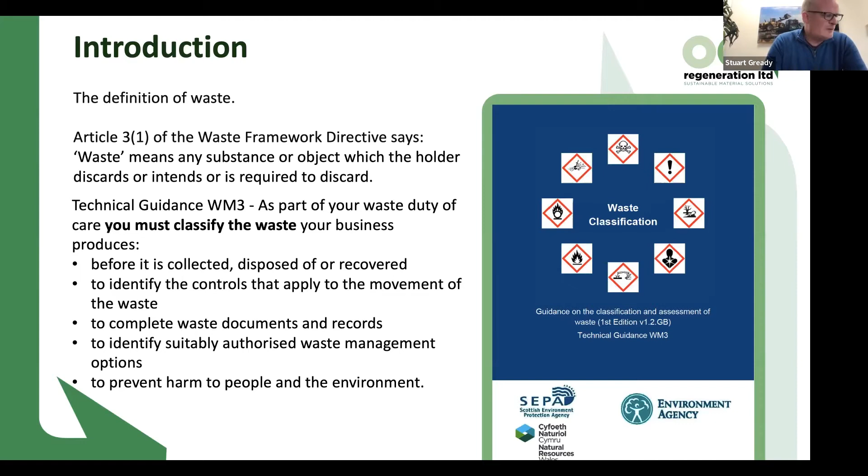Asphalt waste containing coal tar must be classified. So in any highways maintenance works, if there's planings coming out of any job, that waste owner has a duty of care to classify that waste. So before it's collected or recovered, it needs to be classified, and hence the paperwork looked after correctly. And this is to prevent harm to people and the environment.

So the duty of care, there's two pieces to it. The CDM rules, where a designer has to identify and minimize hazards, and the Environmental Protection Act, where any person dealing with a waste has to take reasonable steps to ensure no unauthorized deposits. Now that means in order to understand what an unauthorized deposit is, we have to classify the waste.

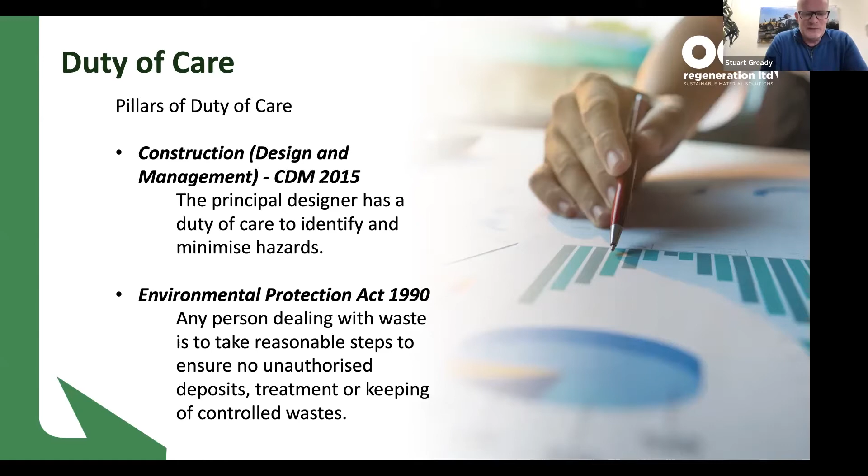So WM3 is the framework here in the UK. And it simply states, it's dead easy, that when you're disposing of an asphalt waste, and when we think about that, milled out asphalt in the UK, if it's non-haz, is often sent back to the asphalt plants for reuse as RAP in the quarries or in the asphalt plants.

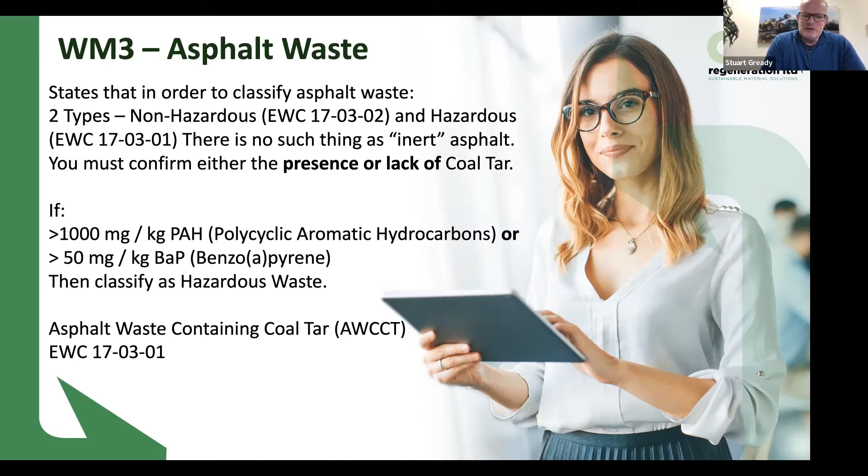And if it's hazardous, then it has to be handled in a different way. And all that WM3 says is you must prove the presence or lack of coal tar. Now, to demonstrate something's got coal tar, it either needs to be higher than 1,000 milligrams per kilogram of PAH or above 50 milligrams of benzo(a)pyrene. That is then classed as a hazardous waste. And I'll just go into that as quickly as I can now.

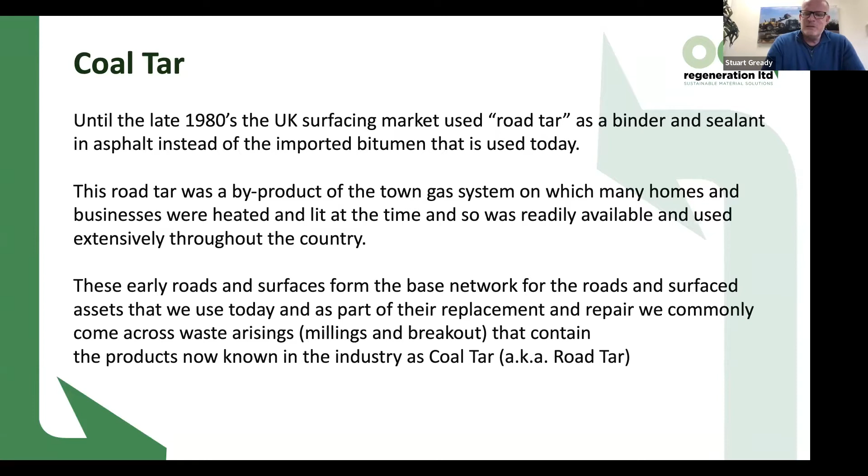So coal tar was a byproduct of the old town gas system that we had here in the UK. It was black and sticky and a good binder, so at the time it was adopted for use like a bitumen in road construction. Now, like lots of things, we've become more sophisticated with how we look at wastes and how we classify those chemical pieces. And since those materials were used, it has been found that it has hazardous properties. So it's carcinogenic, mutagenic, and ecotoxic, and it damages life.

So that means that any of the arisings from the maintenance of roads that are found to be tar bound, as we affectionately call it, or hazardous, need to be handled in a very specialist way. That means that the waste facilities have to have the proper permits. And hopefully, like us, we have the permits because our process is cold, which we'll come on to in a minute. We are permitted by the Environment Agency to bind those wastes back into base and binder course. And that's where that circular piece comes in. So we're recycling the planings at our depots, of which we have 6 across the country, and we are putting it back into a base and binder course.

And that's probably the first touch point between our recycling business and the quarrying industry, because it's not a coincidence that asphalt plants are quite often in quarries and that asphalt uses a lot of quarried material. So what we're trying to do is protect that finite resource of quarried material and make sure that we use it over as long a period as possible. And we'll come into that with the circular economy a bit later. So if it's got coal tar in it, it's hazardous.

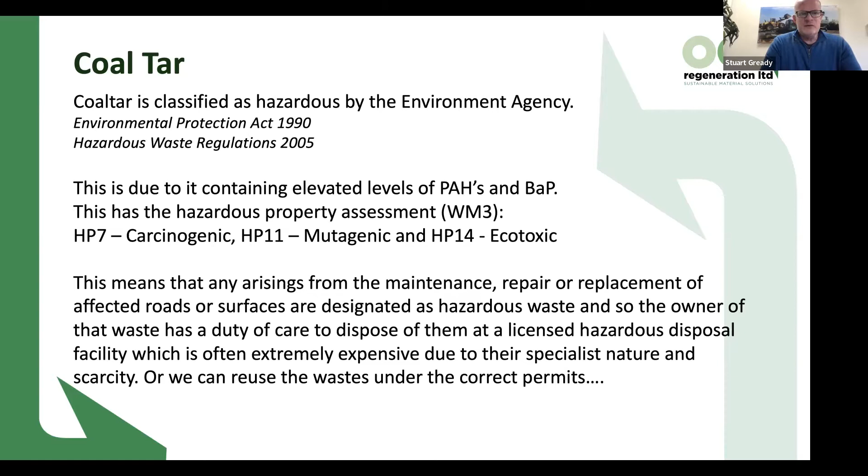Now there's a cracking document out there. This isn't for reading, it's just a prompt for me to share this document with you. So ADEPT have done a fantastic document called Managing Reclaimed Asphalt. This is supported by the EA and endorsed by the MPA. And it's basically a flow diagram that helps you to make waste-based decisions and risk-based decisions so that you can correctly characterize your waste and hence correctly dispose of it.

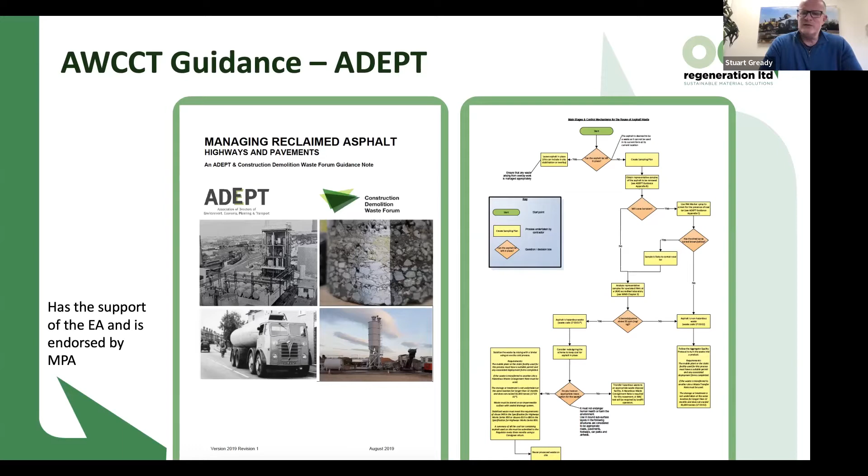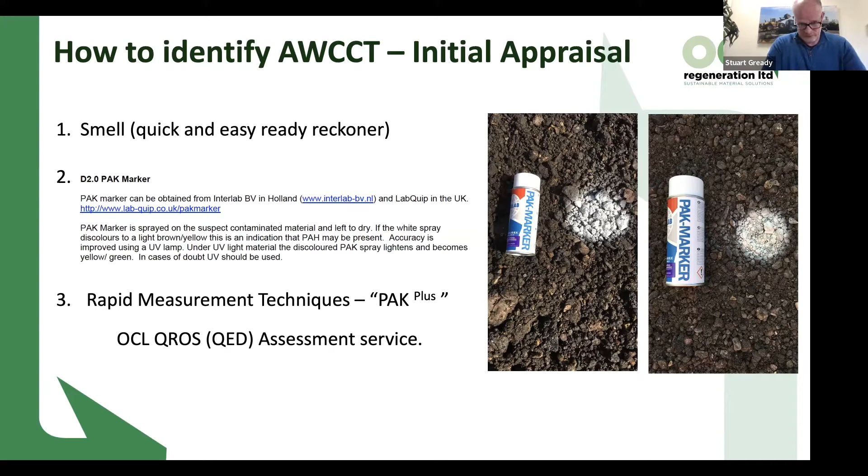Now, the first thing about the tar bound, lots of people probably come across it in their working lives. It's got a distinct odor to it. The really quick ready reckoner is the PAK marker, which basically turns yellow if there's tar bound present. But there's a word of warning here from me. There's a lot of false positives with PAK marker, so it isn't to be relied on as totally infallible. However, it's a good quick way of characterizing your waste. So if it turns yellow or it goes green under certain conditions, then that material is tar bound, and hence we need to start thinking about how we're going to dispose of it.

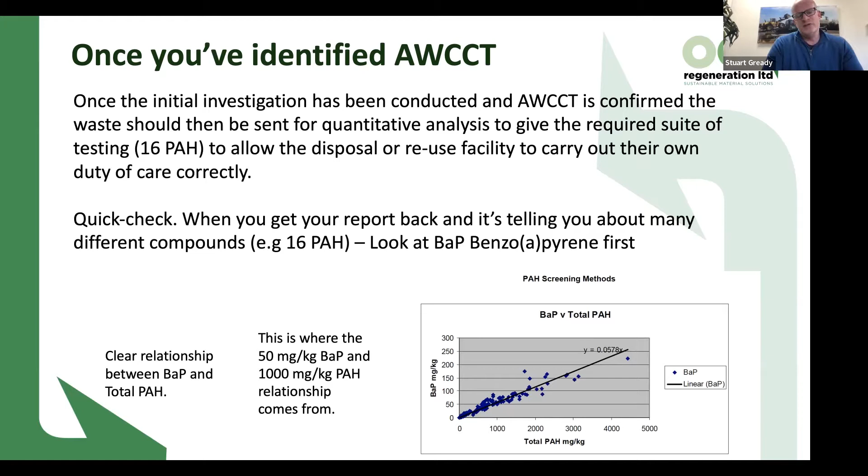Once you've identified that it contains coal tar via the quick checks, you then need to get a proper laboratory test done, and that will help us to understand exactly at what level that contamination is. And the licensed facilities will require that test to be done so that they can handle it properly. Of course, as with everything, we like to apply the waste hierarchy. So if you can possibly engineer it out or recover it, the worst case scenario needs to be disposal. And that's basically the waste hierarchy that we apply.

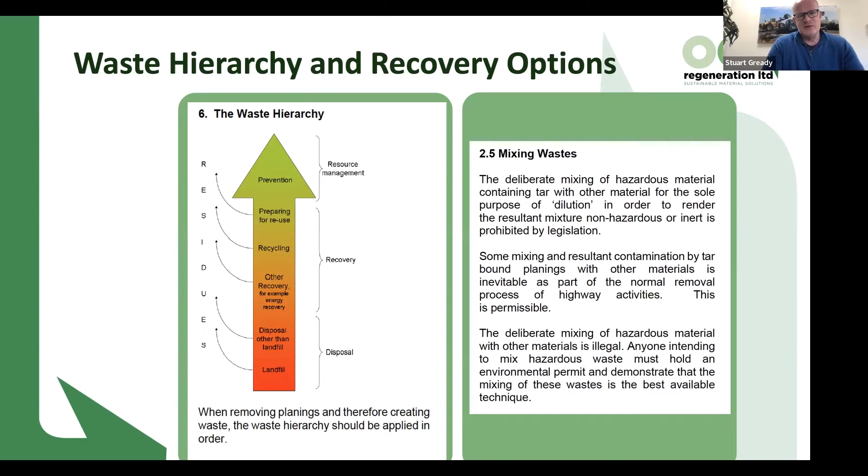Now, the Environment Agency have released 2 regulatory position statements on this topic, RPSs. The first one is number 75, and that is all about the movement and reuse of AWCCT in approved methods. And 157 regulates the treatment. Now, they all centered around the fact that the contractor must hold the right permits. So, as I said earlier, those cold processes are permitted by the Environment Agency because, frankly, they've looked at the risk and deemed that it isn't going to be damaging to health, and it's a really good way of getting this material recovered and back into the asset rather than it going for disposal, which is obviously not very sustainable.

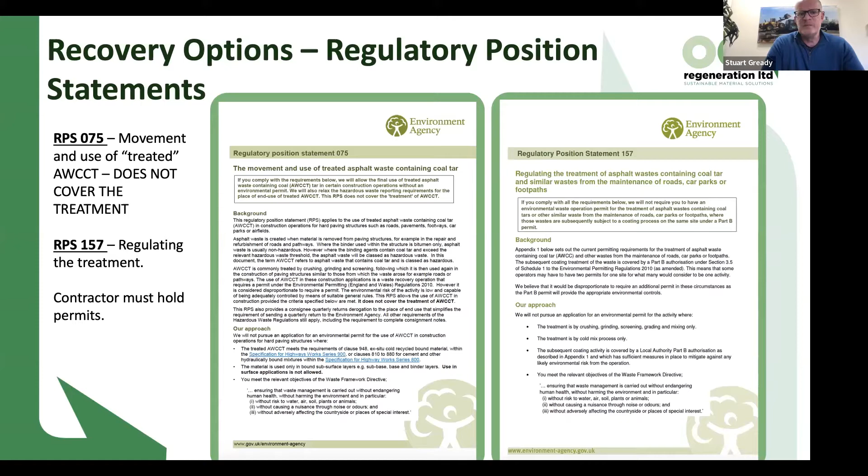So hopefully I've whizzed through that quick enough, but in summary, if waste classification, if highways are part of your life, then we can de-risk on the compliance piece so that you're making sure you're classifying the waste correctly, and the cost piece, because obviously recovering it and reusing it, we hope, is always cheaper than sending it to disposal tips, which are very scarce, and there's a lot of haulage involved, and it's not very good for the carbon footprint. And then we're maximizing innovation as well, which really is what OCL is all about.

I mentioned the depots across the country. All of those depots have bespoke permits. All of those depots are crushing and screening these wastes and turning them back into products such as CRBM and HBM. So those routes, if you want, are available.

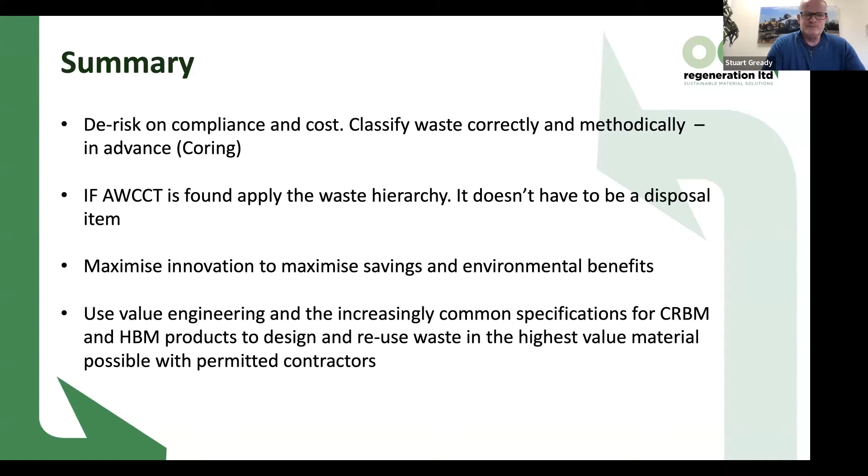So now on to 2 of the materials. We actually use the tar bound in these products, but this isn't just about that. This is about these 2 families of products that are available to the market as more sustainable surfacing materials.

I'll just grab a slurp of coffee.

Okay, so Foambase, cold recycled bound material, you'll hear it called, which is CRBM. And the specification for those products is the Spec for Highways Works 948. So it's in the white book, it's in the code. And more recently, last year, BS 9228 was published. And again, that is another standard that now covers the use of these materials. So Foambase is our proprietary trademark. There's others out there, but this is used as a base and binder course replacement. So when we're talking about surfacing materials, Foambase is an out and out surfacing material.

The product to the right is hydraulically bound material. Now this is a much bigger generic family of products. And you might hear CBGM, which is cement bound granular material. You might hear fly ash bound material, FABM. They're all that sort of generic family, and there's a lot more specifications for them. So you'll find them in 800 series, you'll find them in BS EN 14227, and again, more recently, BS 9228.

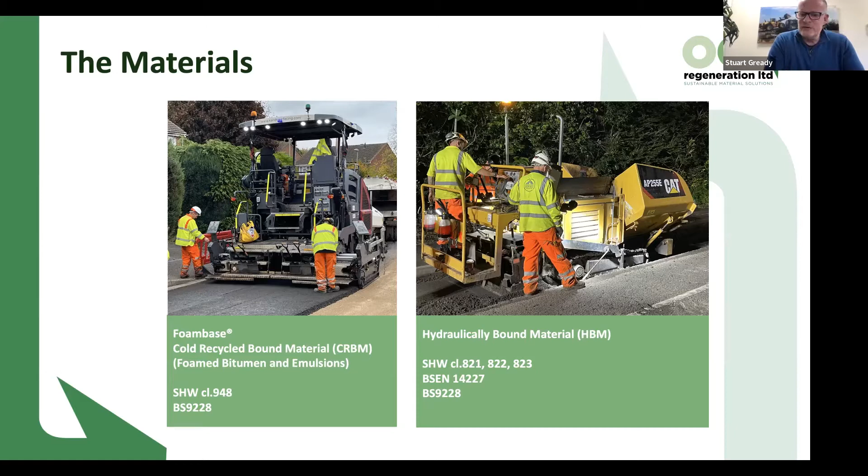So this isn't for reading. These are available to you. If you want to pop me an email, I'll very gladly send you these, but this is just as a prompt to tell you a little bit about the product.

So Foambase is an HRA 50, DBM 50 equivalent when we make it in the B4 classification. It's got all manner of benefits to it, which we'll come on to in a minute. But basically, the main one, and the one that we're getting lots of traction with at the moment, is that Foambase saves 50% CO2 compared to normal base and binder course hot asphalt. So lots of local authorities and stakeholders and tier 1 contractors are very excited about using these products at the moment and trying their best to get them into as many works as they can.

Now, recycled materials, you know, they are innovative. You do have to have more control, more quality plans, more design mixes, and more compliance testing on your production to make sure that we're trying to create a more homogeneous, stable and regular product. So an awful lot of work goes into that.

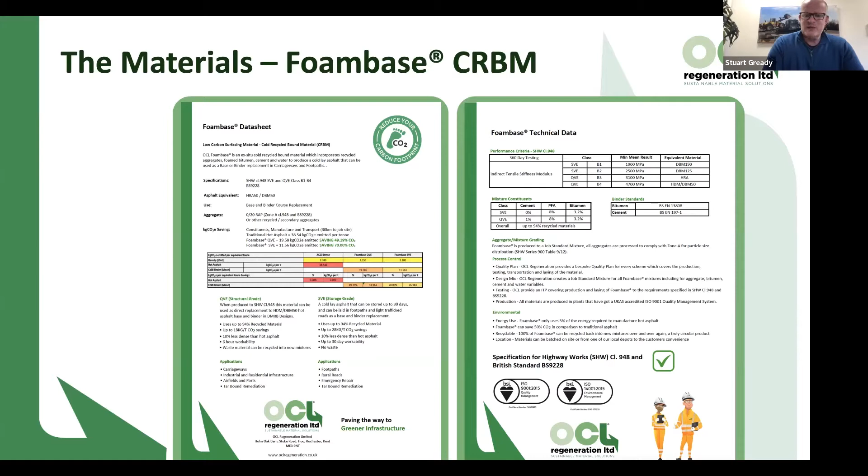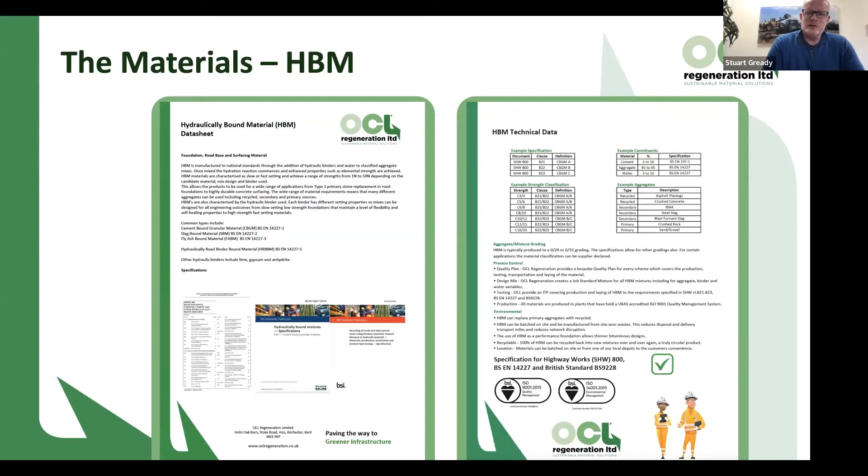HBM is more of a type 1 or a capping replacement. It can be used in some road classes as a road base, but it's not very common. And frankly, the main thing about HBM is that it creates like a performance foundation. So we're replacing primary capping and type 1s with these products.

When we think about the waste that we're recycling, it's not a coincidence that it's been mainly planings and mainly highways wastes that we work on, because there's that closed loop thing. So depots can receive breakout or asphalt from the maintenance schemes and crush it and screen it and mix it and send it back, which is obviously keeping those lorries loaded in 2 directions and really making the best of the circular economy drivers that we really work to.

And you can see here that we're recycling the asphalt waste containing coal tar, but we're also recycling non-haz asphalt waste. Now, this part of our business over the last 3 or 4 years, we've noticed, has diminished somewhat, because the non-haz asphalt, some people call it clean asphalt, some people call it inert asphalt, although it's not, the non-haz asphalt can be reused in hot asphalt.

So a lot of those big assets, those big asphalt plants, are maximizing the amount of RAP that they can get back in. So commonly, 20 years ago, I used to get an awful lot of RAP, an awful lot of non-haz planings. Now we get very little because they're being used so well by the rest of the industry.

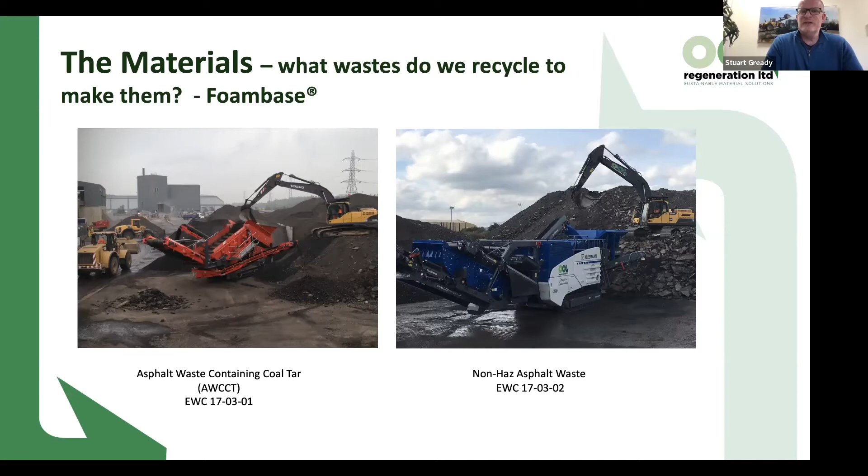What we really try and do is maximize the value. So we try and take a waste, which sometimes the worst case scenario is it might get flogged to a farmer for an access track, or it might have a very low value piece that is not unlocking the value, whereas we try and move it up into the maximum value product. That's part of our ethos.

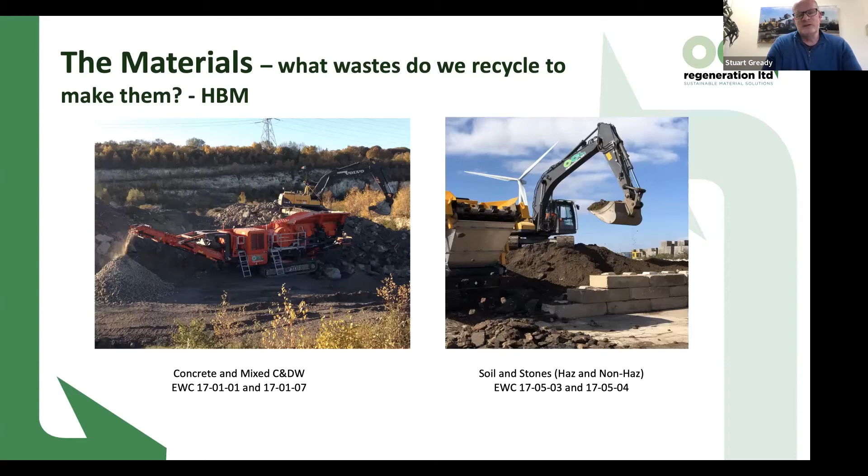That's a big thing for the industry to take. So Foambase is good because it goes further - 15% further, so ton for ton you get more work out of it. And also there's a reduced cost piece, which obviously helps us to market the product. It's made up of 94% recycled, and the best example is 100% recyclable.

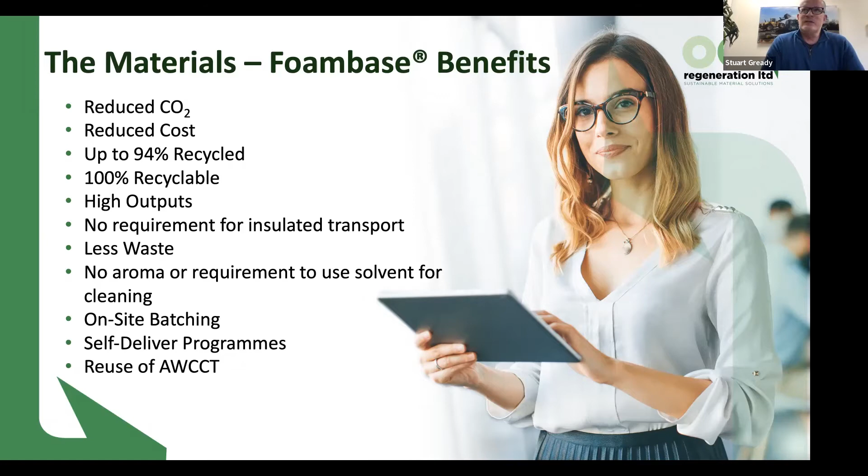And more with those haulage issues and those programming issues and shortages of stone and all the things that are impacting, self-delivery is a saying that we hear an awful lot about every day at the moment. So the fact we can mobilize to site, we can do on-site batching, and we can protect projects from some of the vagaries of material supply at the moment is really interesting.

Now, HBM isn't as sexy on the green front. So Foambase is saving 50% CO2, but HBM relies on a hydraulic binder. And hence, although we do use cement-free, we use cementitious alternatives, it's not as good with the green credentials.

But what it does do is allow the reuse of a lot of bogey wastes, if you want, waste that might only go out as a cheap fill or a cheap type 1. We can use those and get them up that value chain as I was describing.

And that means that you can go thinner on the asphalt. So because we're making a performance product, replacing a type 1 with something a bit better, some designers can then thin up the asphalt design, which is good for the environment and another way of protecting those finite reserves in the quarries.

The other thing it does, and one of the big drivers, one of the big things we enjoy in our business, is tip and take. So we really strive for the wagons that are dropping off their waste to collect their product and go back to the site, so that we're trying to ensure we're loaded in two directions.

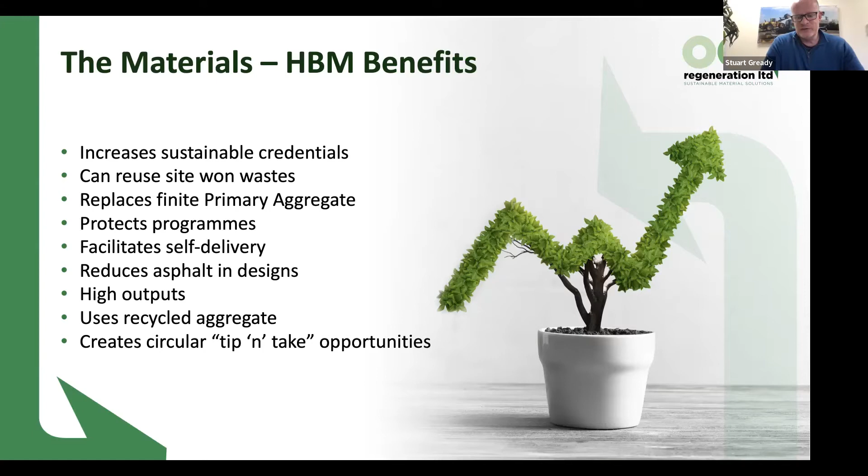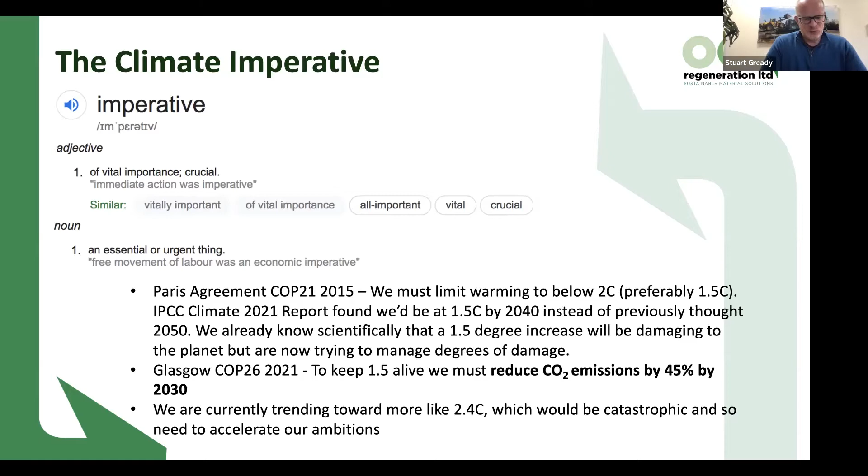So the climate piece, I'm afraid I wouldn't be doing my job if I didn't just quickly go over this. I know we've had it all at the very forefront of our minds over the last few months, but we call it an imperative. I've been calling it an environmental imperative for 10 years now. Obviously, with the advent of COP last year and the fact that we now all understand scientifically that we've got to keep 1.5 alive, there's a huge drive on to reduce these CO2 emissions, and we've all got to do our bit, be it domestically or commercially at work.

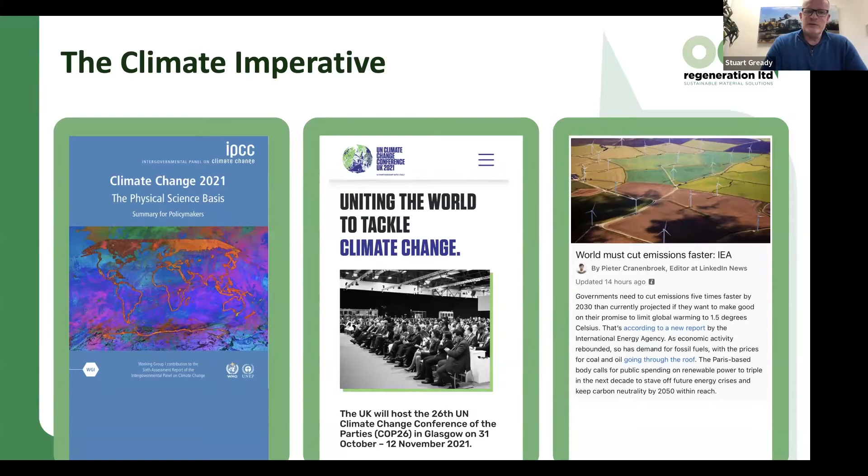So these documents have really come around recently, and some of these dates are very close to us. These have supported sustainability and green products really getting some traction. I think the UK was a bit behind the curve, if I can be truthful, but I do see there's a lot of acceleration now, and these documents and the testimonies we're getting now - this is two examples - really I show you this so that you can get a feel for the acceleration.

So the place I think this has got touch points in the quarrying industry as well is that we're told that within quite a short space of time, local authorities and the big stakeholders will have their budgets given to them based on a kind of environmental scoring. So they have to be seen to be doing the right thing now, making carbon-based decisions.

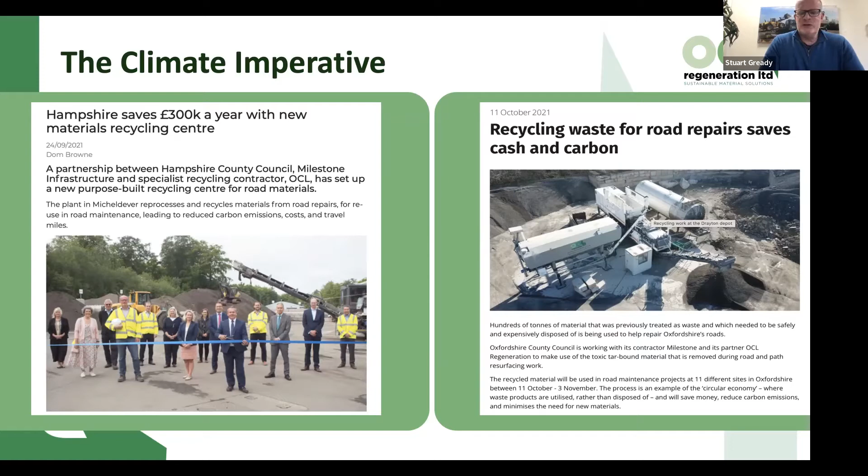And this is just two depots from late last year, which I helped set up, and we enjoy working with our stakeholders there. It's just to try and show you how quickly these things are kicking on.

So you've heard me mention circular economy quite a bit. In the quarrying and highways industry, for a long, long time in the UK, we lived on more of a linear economy, which was kind of make, use, dispose. But the circular economy is so important for us now, reducing waste and delivering a more environmental and competitive economy has really come to the fore.

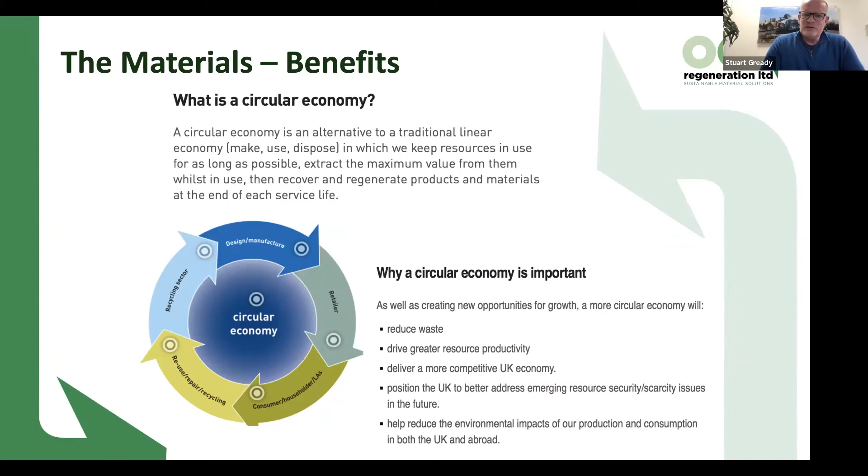So with these cold laid products, there's nothing to stop you using them again and again and again, because there's nothing in the recycling process that precludes that. So it's very important that we extract the maximum value from all of these resources.

Now, this is where I talk about the linear quarry concept. National Highways make some fairly brave statements about this. They say they're the biggest quarrying company in the country because of all that stone they've got locked up in their assets. When we talk about the linear quarry concept, we're talking about the fact that with that circularity focus, the road of tomorrow can be made of the road of yesterday.

So on the left here, we have a traditional quarried stone road design, with the capping, the sub base, the base course, binder course, and surface course all made of traditional materials. And on the right, we have the road design that we try to champion - the capping and sub base replaced by an HBM, and then the base and binder by Foambase. The only piece that remains the hot traditional version, if you like, is the surface course.

And that's because basically that is the human piece, that's the public realm - that's what people walk on and drive on. And we all know in reality that recycling can have the odd fleck of this or piece of that in it, and it doesn't matter how vigilant we are, that's always going to happen.

And so there's a lot of work going on about low energy surface courses, which we'll come on to shortly. But that recycled content for performance, and for the reasons I just mentioned, is more like 30, maybe maxing out at 50% recycled through - and that's with a lot of vigilance and a lot of discipline at the waste end of that.

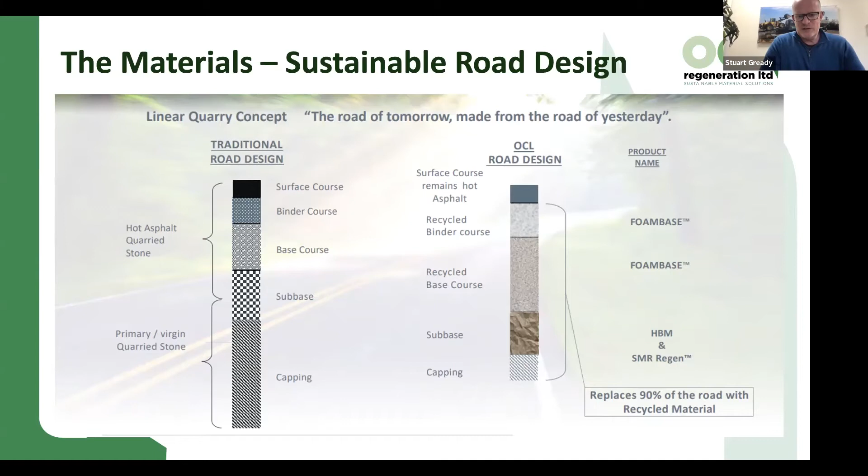I don't know if you can see that, because some of the screens have actually blocked that out. This is a study done by Lafarge Tarmac, as it was at the time, which obviously then went on to be Tarmac, and the Carbon Trust. This was, I think, about 8 or 9 years ago, when they started to talk about the carbon footprint and the savings available for warm and cold products.

So there's been an awful lot of work done by the majors, a lot of good work about warm asphalt - you've probably all heard it being talked about. And really importantly, National Highways just last year have allowed its use without a departure. So a lot of development going into warm, for the obvious reasons - you've got that 9, 10, 11% carbon saving.

Similarly with the cold, back when this was written, it was talking about 40% savings. We're now up at 50% savings, because like anything, we've refined that, become a bit more sophisticated, and also we report it more accurately. So when we talk about CO2, we've got that fantastic ability to really make a difference on some of the big volumes.

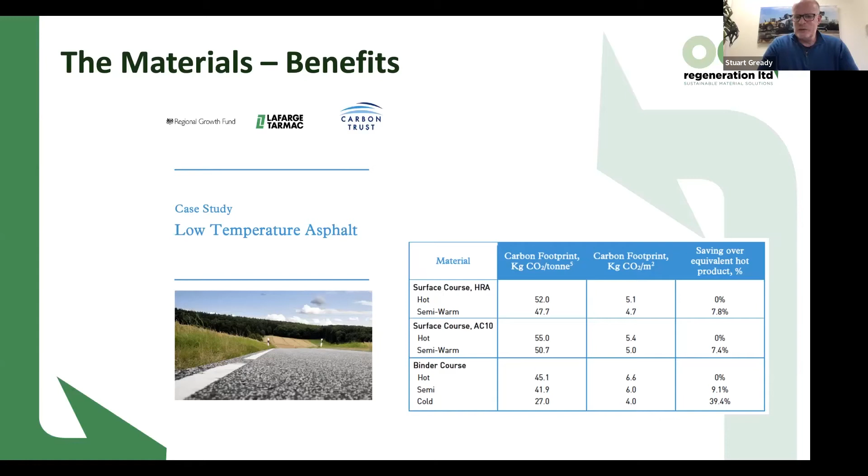Then we've got whole life cost. And this really is edgy stuff - I can't share with you enough that these two pieces have only really come about in the last 2 or 3 years. We've had the carbon, we've got the cost, and we've got how we're looking to spend the local authorities' budgets and make the money go further. And this whole life cost study was done by ADEPT, so obviously a very reputable organisation, and Skanska and Oxfordshire County Council.

So we've got that double benefit. We've got 50% CO2, we've got 20 to 30% cost. So really, there's an awful lot of work going into this at the moment.

And just today, I had a phone call from a friend in one of the big test houses who's advising National Highways. They're looking to build on what they've achieved last year with warm, and they're looking to make changes to the DMRB, the design book, to get these cold products into more roads in the UK.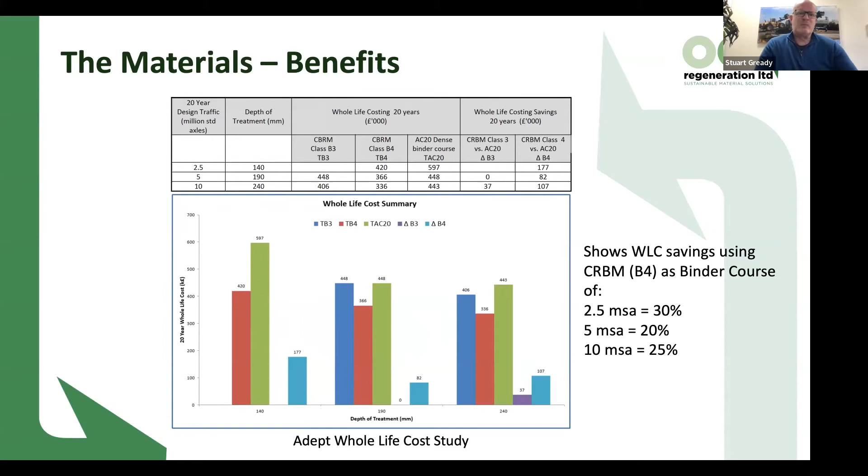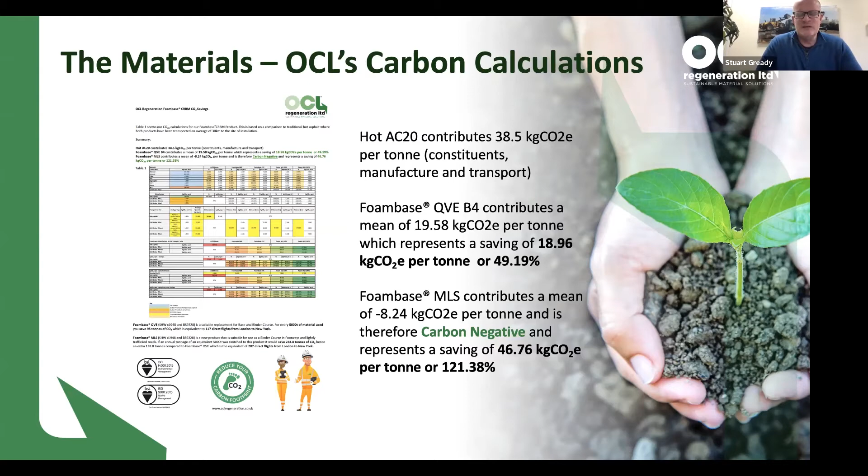Again, a very busy small slide, but this is available for you if you want it. Just drop me a line and I'll send it to you. This is where we're working and validating and verifying the cost saving, the carbon saving, of 50%.

Okay, so a little piece about the specifications. I don't know who in this group is specification driven, but we have been on quite a long journey with these products. It's really important that we apply their use pragmatically and that we stick to the specifications so that we don't pick up any risk.

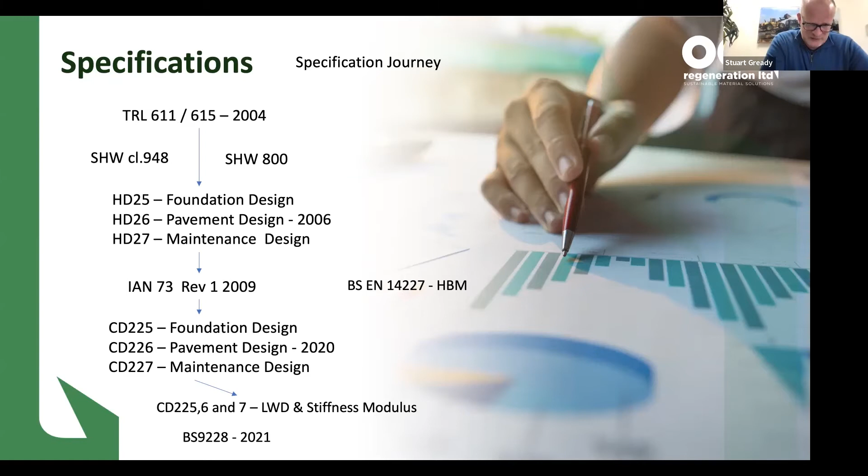Back in 2004, we were using TRL 611, report 615. We've been on a whole journey in between then and now to the most recent incarnation of the design book, which is CD 225, 6 and 7. As I mentioned earlier, we've got a really good spec now in the British standard, which is 9228, and that only came out as recently as September '21. So what I'm trying to share is that there has been backup, there has been a long journey on these specifications, and just recently there's been a new specification.

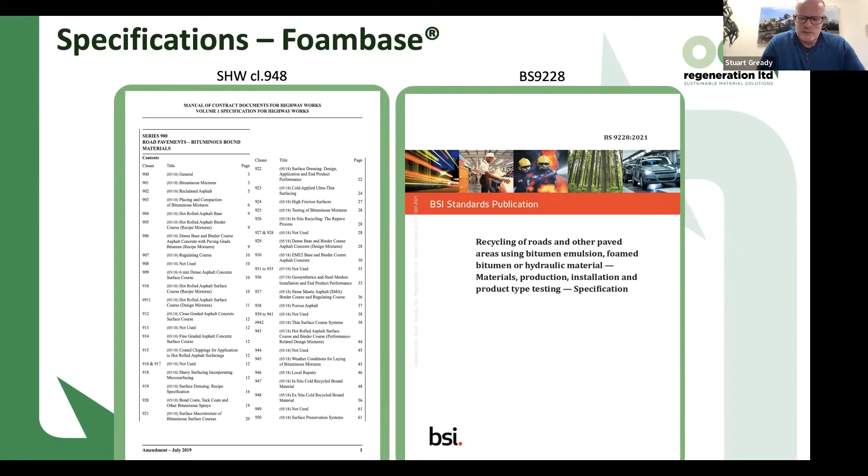This is just pictures to basically share. This is kind of a one-size-fits-all presentation, so I can be giving this to designers or to local authorities, etc. So this is just literally a pictorial version. And this is where I would share just how useful I think that BS 9228 specification is.

Clause 948, although great and a big step on from 611 in my view, is just about National Highways, Highways England as they used to be. It's about their kind of work, whereas 9228 is a lot more of a useful document, a dummy's guide, if you will.

It kind of looks at how you assess the site. It gives you how to do the mix design, how to sample, how to test, how to look at the tolerances, aftercare, and all of the above. So it's a much more usable document for someone like, say, a developer or someone who was putting in an unadopted road or someone like that. So this is trying to increase the use of these products and again, protect that finite resource back in the quarries.

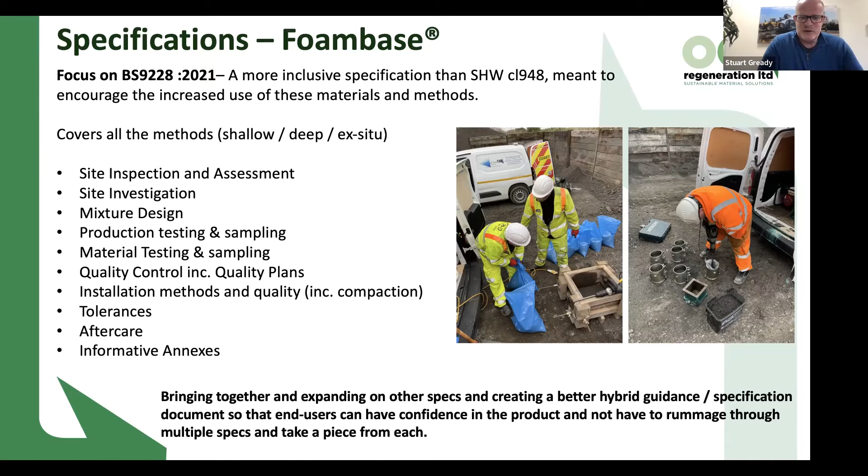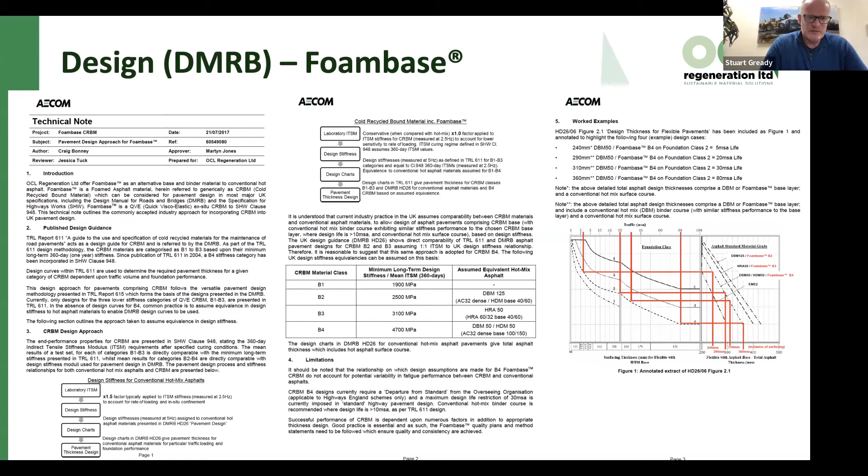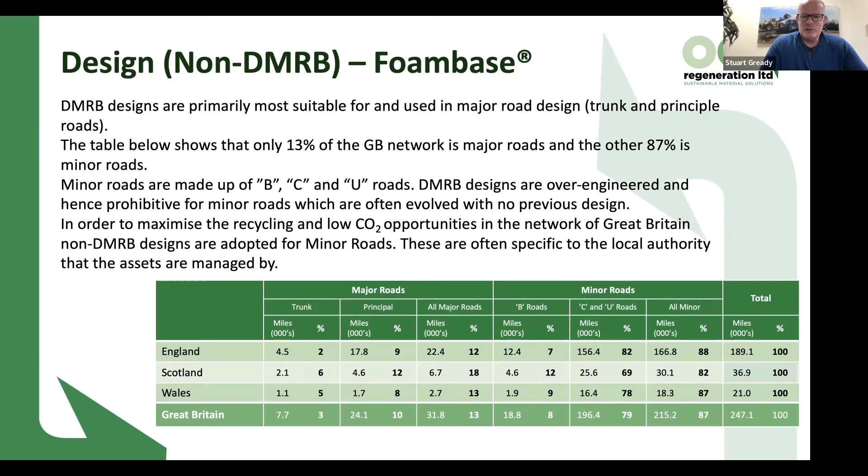So they're more like an evolved network. They're made up of various layers of bits and bobs that the local authority have applied over time. And so we're targeting the designs in those roads because that's basically where we can get most of the opportunities to get those wastes back into the network.

We always provide that service where we're providing the design to de-risk the customer. So these are some really good examples of where those products are getting used day in, day out at the moment.

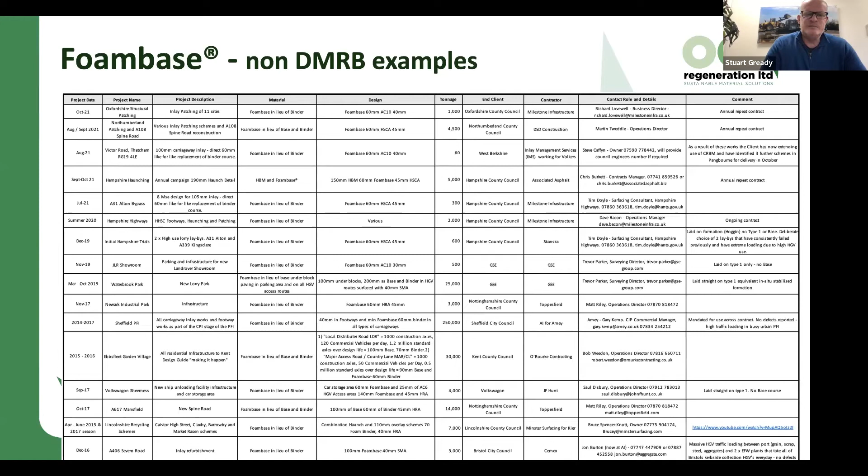Spec for Highways Works 800 or BS EN 14227, but again BS 9228 was written about the CRBMs and the HBMs, so that useful document can be used again for specifying HBMs. And importantly for us, the SROH 4th edition, May 2020, now states that HBMs are a standard material, so you don't have to do any aged analysis or apply to the committee to get them to study things for two years. That's all been taken away to increase the use of these products because there's a track record. HBM's been used in the UK since the 50s and 60s, so they don't want to block the use by being overly bureaucratic.

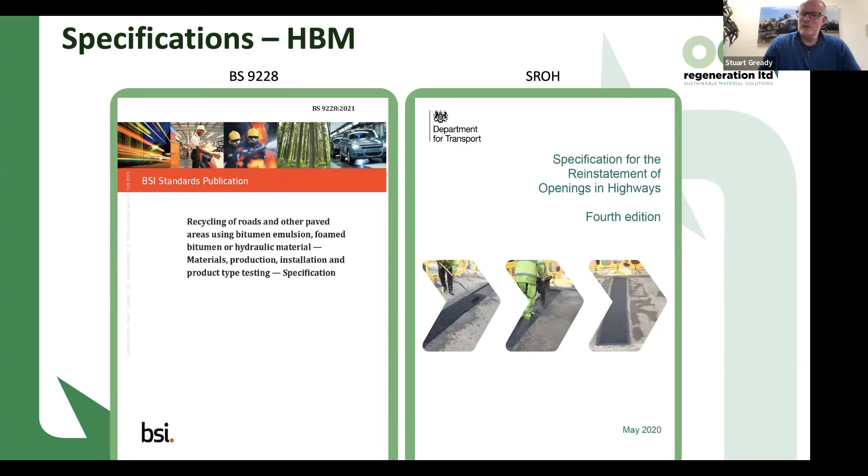Now just a quick piece on quality. Everything I've said is from a standpoint of a company who have the benefit of the quality systems and understands the spec, and we've been at this for nearly 20 years.

Now there's a lot of ability. It's like anything, that recycling bit where someone buys a crusher or a planer or a mixer and they think they can just crack on. But what I talk an awful lot about is the pragmatic use of these materials, because you're only as good as your last job, and you do have to handle them in a discreetly different way to normal products. That can only be shared by companies who have 9001.

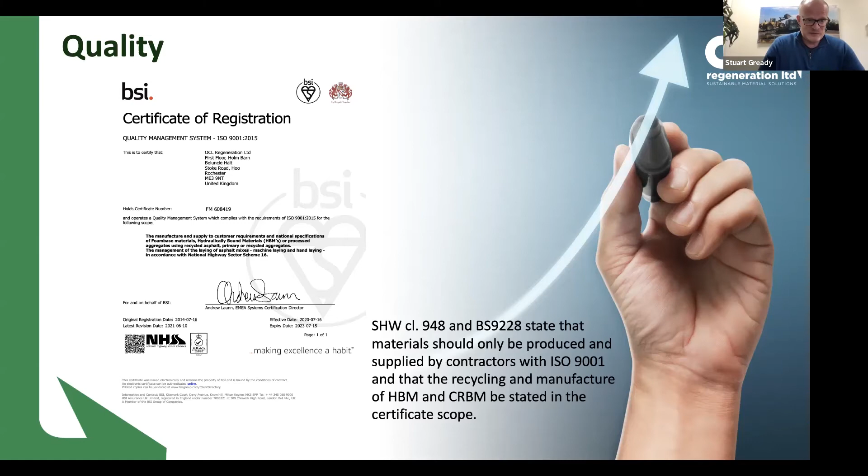And in all those specifications, it says that the manufacture of those products must be stated in the scope, and that's a precursor to the whole quality piece. So yes, you can go and buy all the kit and have a go, but basically to get that quality outcome, you have to have the certificate of registration for the 9001 specifically for these products.

Okay, so now I'm just going to whiz through a couple of the methods that we use here in the UK. You'll find three methods, one being retread, which is the shallow sort of scarification, regrading and compaction of the roads. Then you've got deep in situ - we've probably all seen the big rotavator things on big flotation wheels going down 75 to 300 mil.

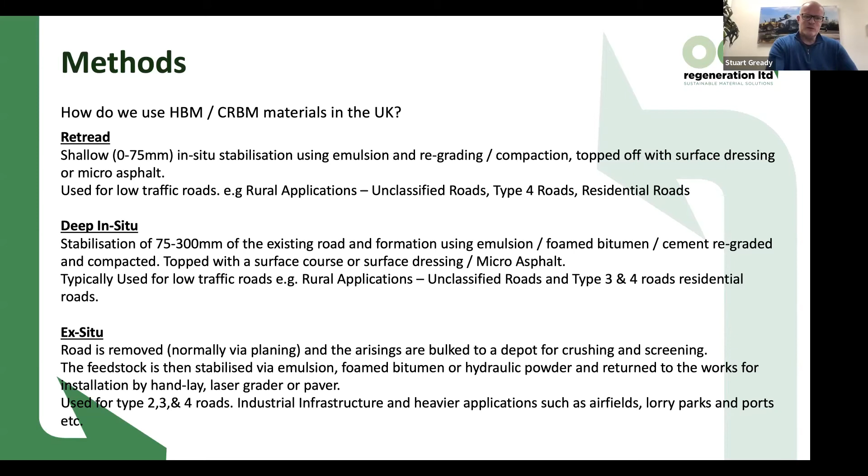And you've got ex situ, which I've got a bit of a focus on because it's exactly what we do as a business. Retread is really good bang for your buck. Deep in situ is a good treatment, you're getting a lot of depth of treatment. And then ex situ for us, we're removing that road normally via milling, and then the arisings are brought to the depot where we crush and screen them. We're more like a virtual quarry - you've got a surge pile, we crush it and screen it, we approve it to a grading before it then gets adopted into the manufacturing process.

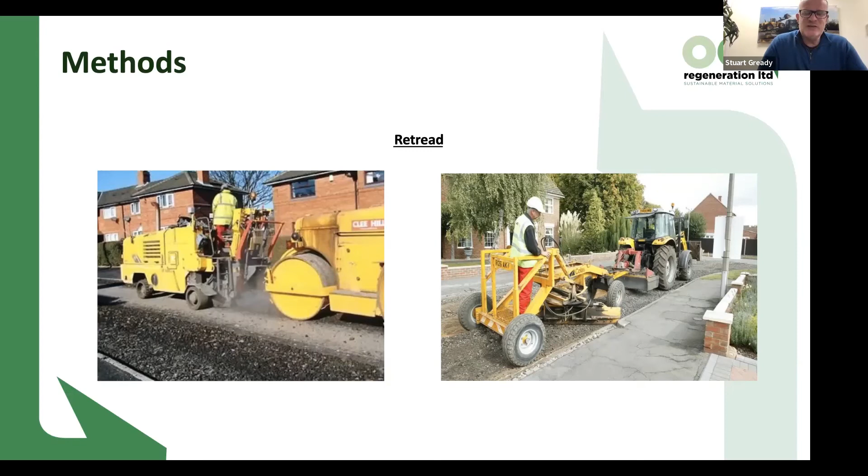Just some pictures of what that looks like. This is retread being undertaken here by Colas. You can see it's quite agricultural - it is good value, but quite often not the longest lasting process in the world.

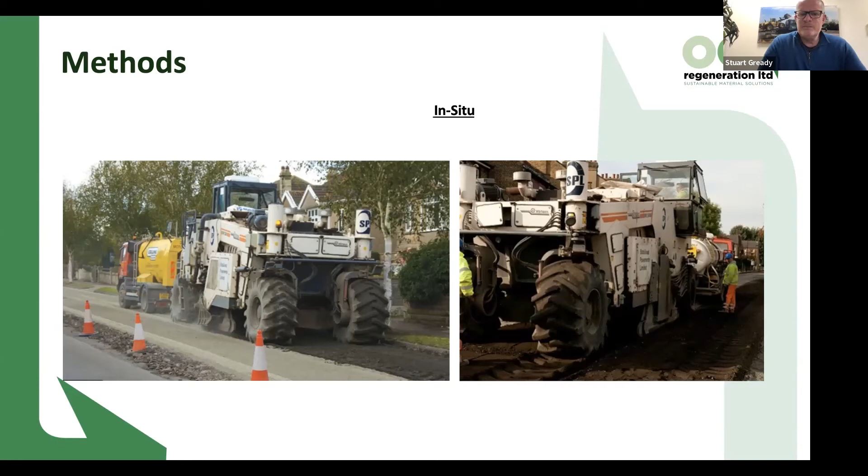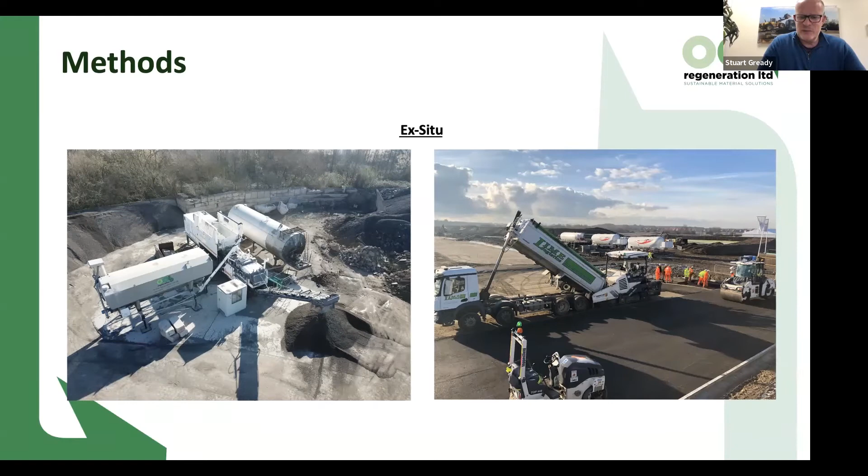You've got deep in situ, which is a lot more invasive, a lot more energetic, and then you've got our processes, which is like the factory, and obviously we're getting outcomes that are more akin to a hot asphalt plant because we put it on a lorry, it gets laid through a paver.

The pros for retread are that yes, you get a good fix, a quick fix and good value for money. The cons are it only treats the upper pavement and quite often leads to revisits. Deep in situ gives great outputs, good value for money. The cons are it's very invasive and there is a propensity to over cement. Now anybody who understands pavement design knows that we like a bit of movement down low and we don't really want rigid foundations and rigid base courses in this country, because it can lead to reflective cracking in the upper layers. So that is one of the risks when we talk about deep in situ.

When we talk about ex situ, the pros are factory process control - we are basically an asphalt plant where instead of the quarry, we've got our feedstock. The cons are there is again the ability to over cement, so you can go too rigid if you haven't got the right quality control in place, and also the scarcity of depots.

It's all very well us having this wizzo product that's being adopted more and more, but basically for it to work, there needs to be more depots, because there's only probably 10, I would say, in the country, of which 5 or 6 are ours. And so it's very hard to promote the benefits of a product when the depots are few and far between.

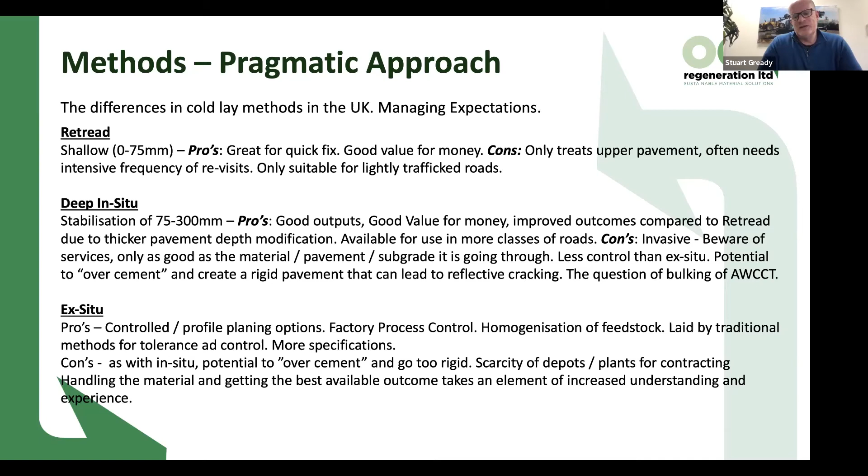So I'm just going to take you through a few examples, bearing in mind that this is about recycling and low CO2 surfacing.

This was a great scheme we did in Ebbsfleet Garden Village in Kent. This is an ex-Tarmac, Blue Circle cement works - they'd just demolished all the infrastructure and it was sold as a giant housing estate. We were lucky enough to be invited to work on site and recycled all those old assets, crushing concrete and digging up the old roads. We made an HBM and Foambase design, putting in all the spine roads and infrastructure roads for this whopping great housing estate.

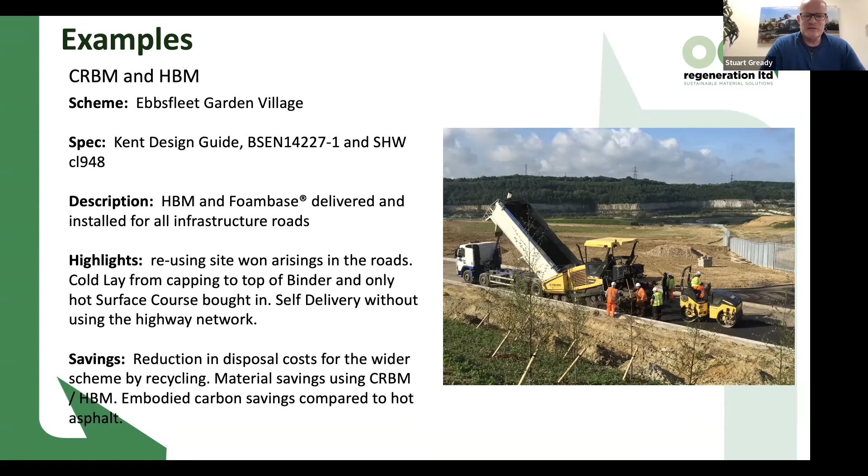Luton Airport was a big piece, a big feather in our cap, because it was the first time HBM and Foambase, or foamed bitumen/foamed asphalt, was used in a taxiway. We also did the long-term car park. So now we're playing in the realms of the super duper consultants, and it was massively technical. There were an awful lot of attendances on site, and a lot of work on the design. We were very proud to get that one over the line.

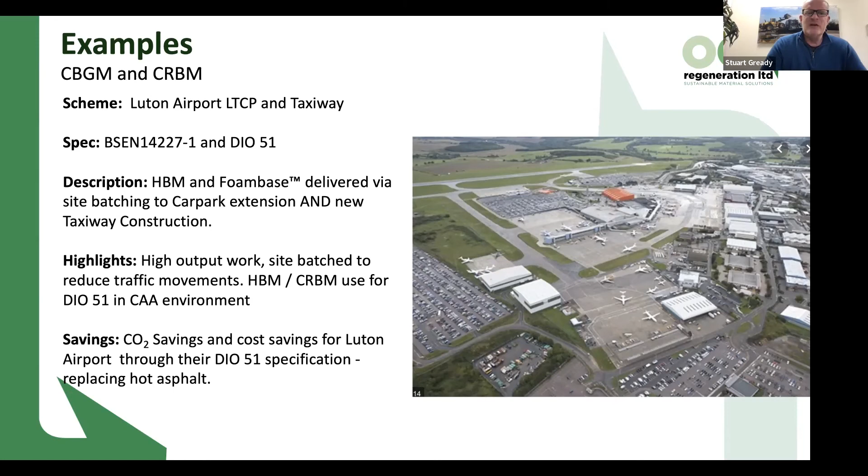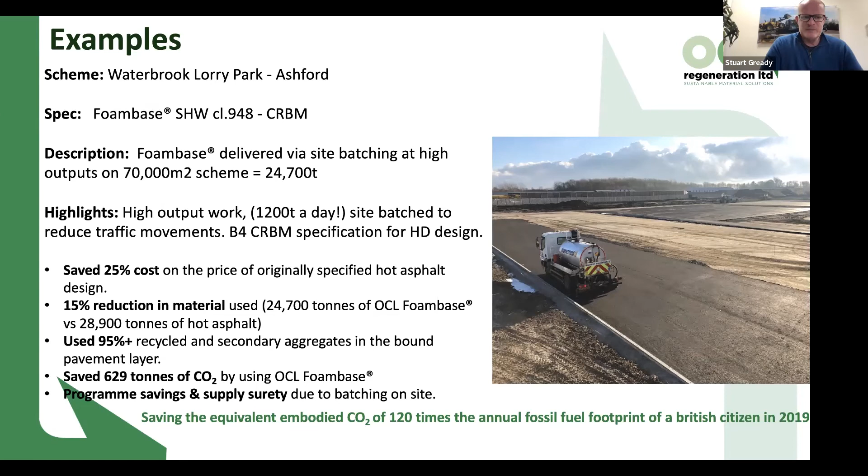Recently, as an example of a big scheme, we did a massive lorry park in Ashford in Kent. This was a great case study because we got the high output work going - we were doing 1,200 tons a day, which anyone working in the asphalt side of the quarrying piece knows is quite a challenge at the moment. We saved 25% cost over hot asphalt and 15% reduction in material, which was the density I described earlier. That one scheme saved 629 tons of CO2, and we got an award for that. Just one scheme in Kent saving that much CO2 - we're really proud of it. And then some local authority stuff.

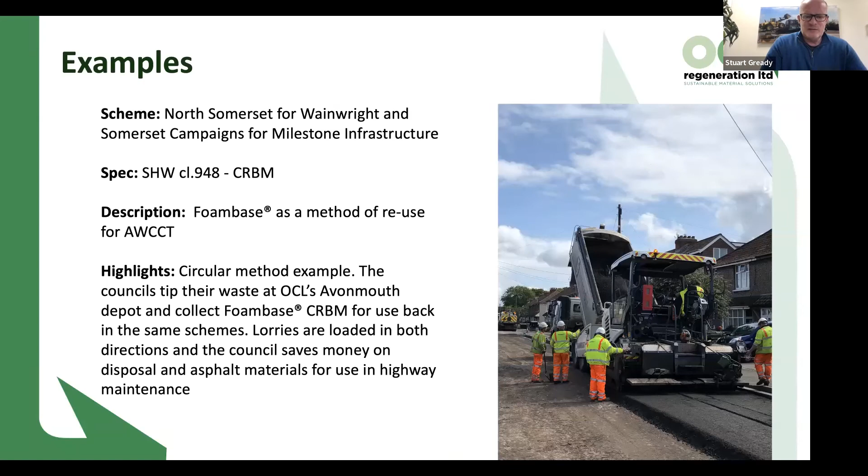I'm just going to whiz through these. In Somerset, from our Avonmouth depot, we work with Wainwright - a contracting company with their own asphalt plants, but very progressive and proud to work with us because it helps them with the local authorities. It's a great example of a circular method: they bring the waste from local authority maintenance work to our depot, take the Foambase back, and it's laid back in that same road.

Similarly with Hampshire, we've got an annual contract there, so there are big CO2 savings and big cost savings. Hampshire's quite a tricky county to get stone to, as you know - it's coming down from the Mendips or coming in by sea. There's quite a lot of CO2 and cost associated with getting aggregates into the Hampshire area, and this is not a coincidence as to why recycling is going really, really well down there.

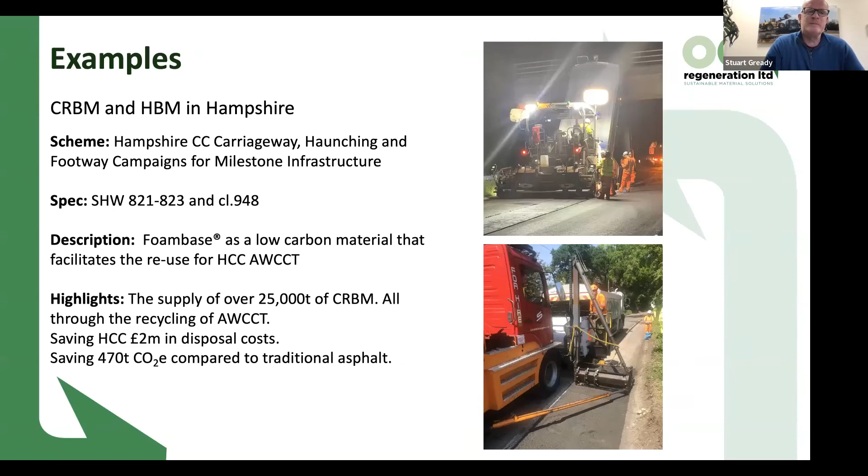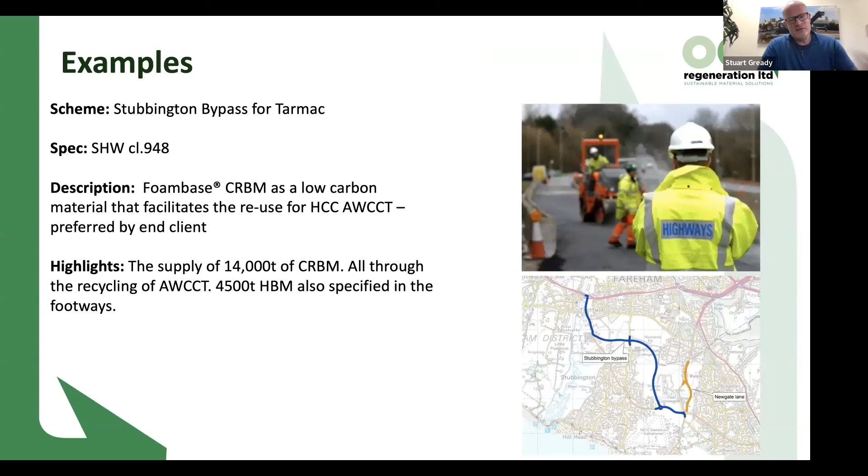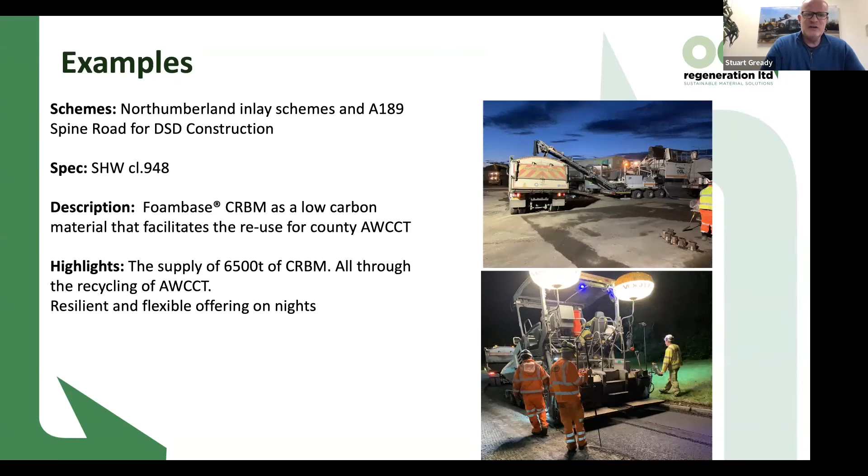Stubbington Bypass for Tarmac - we just concluded the main surfacing package. We're still there on footways at the moment, but that will have been 18,000 tons of our products by the time it's finished. We're up in Northumberland, working again with DSD for the local authority, making those carbon savings. Same with Oxfordshire - sorry if these are a bit repetitive, but I quite often have different people who want to see different ones.

So in summary, we can affect change together. We're talking about the sustainability piece and the circularity - trying to make sure we protect those finite resources. We can collaborate on risk through long time-served relationships and work that's been in the roads for in excess of 20 years now. Developing opportunities and collaborating is really a big part of what we do. We've got three local authority tripartite arrangements so that we're getting that recycling bit and that low CO2 bit out into the market, so we can make carbon-based and waste-based decisions when it comes to designing. We must move away from this mental copy-and-paste scenario where the last spec works, so we just go with that again - that's not innovative. We can drive innovation together by changing the way that we think about that.

There's a quick video just before I finish, done by our chums up in Lincolnshire. It gives you a nice little vision of what we do and how it looks out in the field.